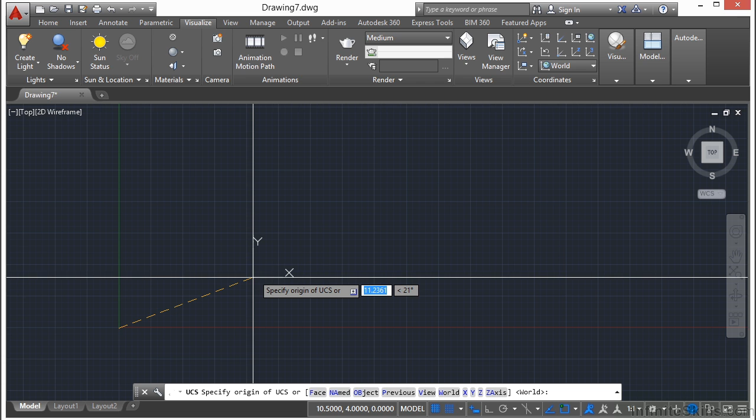Now, you'll note here, once you start the UCS command, that you have a lot of different options available to you. You can create a new UCS based on any of the options listed there. You can also get to a lot of these options simply by right-clicking on top of the UCS icon.

You can go back to your world coordinate system just by selecting the World option. Or you can create a new UCS. You can select that by origin.

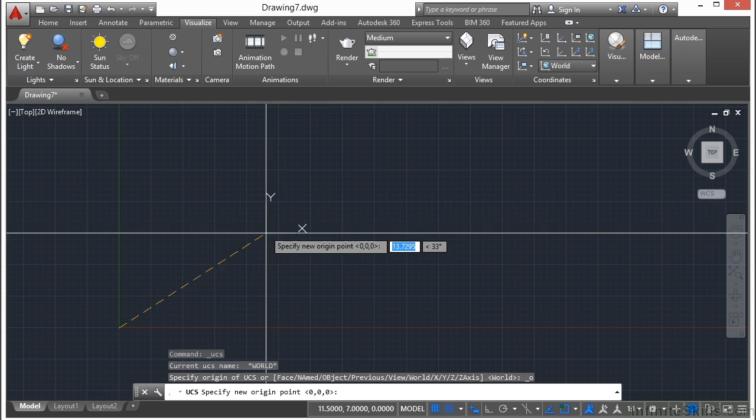So you just pick a new point, and there's the UCS. And you can see that little box is off in the corner. That tells you this is a customized user coordinate system, not the world coordinate system.

So if I select the UCS, I also get some grip options, which we'll talk about later on. But if I right-click on it and click World, that puts me back to my regular world coordinate system.

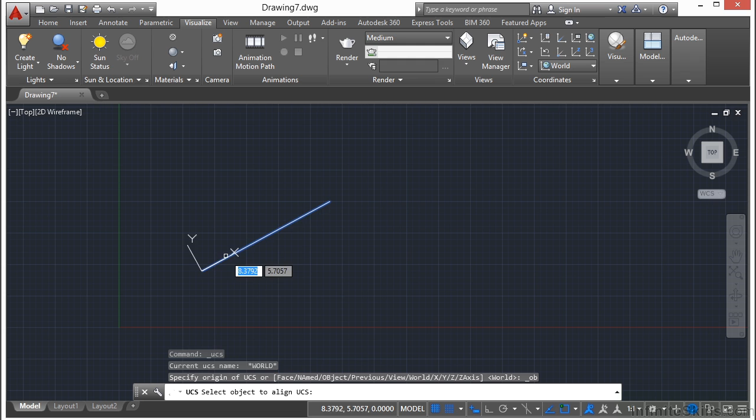So if I have a line, or any other object, but I'm just going to pick a line, and I right-click on my UCS icon, and I select the Object option. I pick an object, and as you can see, it gives me a little preview. That becomes my new user coordinate system.

So it moves my UCS to a new origin, and it rotates it to match the angle of the object I selected. Now if I draw a line and turn on my ortho by pressing F8, it locks me into these orthogonal lines, which are normally perfectly horizontal or vertical, but in this case it's matching the horizontal and vertical of my new user coordinate system. This is a great tool to draw things at specific angles quite easily.

Now, when you work in 3D, the UCS is key. There's a function called the Dynamic UCS feature that will automatically change your UCS to match the face of an object, allowing you to draw on that same plane as the object selected. That's probably one of the most commonly used cases of changing your user coordinate system, when you're working in 3D.

Now, that's getting a little bit heavy for this course, but it's hard enough to keep track of just two axes, much less three, four, or five different coordinate systems that you might want to use. So we're going to try to keep it more simple for you in this introduction.

So you can create your new UCS from scratch by picking a couple of different points. You can even select the icon and just rotate it or move it. Of course, my ortho is on, so I'm going to turn that off.

As you can see, it's quite simple to rotate the UCS that way. You can grip edit it to move it to a new place or make slight rotations, whatever you need to do. Now, after you create a new UCS, you might want to save it. In fact, you probably really need to, in case you want to use it or go back to it later. So create the UCS using any of these methods.

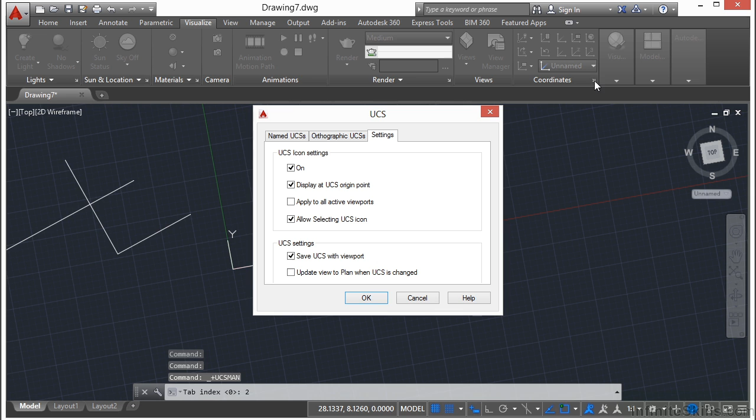Now, if you come up to the Visualize tab again, you see here we have unnamed, world, top, bottom, etc. I can click on this little Flyout button right here, and this will get me to my UCS Manager. So I can get to it that way, which is a real easy way to manage it, or I can come up here to my UCS named UCS option. I can select that, and it gets me back to the same place.

And if I go to my UCS icon, right click on it and click on the named UCS option, it tells me I have two different options. Essentially, I can go back to world coordinate system. If I select it and hit Set Current, then that's where it will take me. It'll set this selected UCS as my current UCS. Now I can select the previous one, and that will take me back to whatever UCS I was using before. Now this is the current one and it's unnamed.

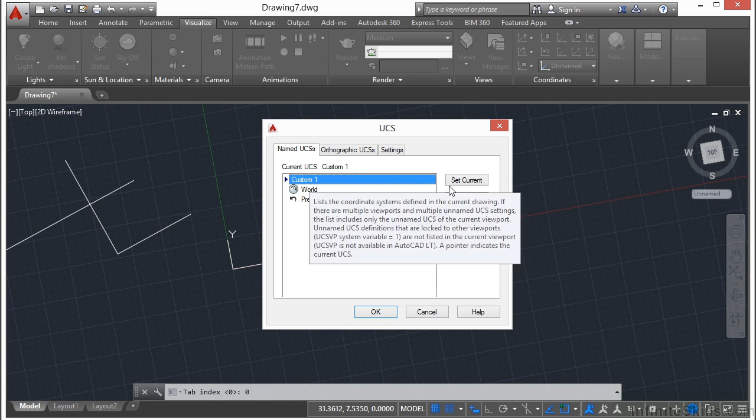If I select inside this box, once I pick it again, I can give it a name. I'm just going to call it Custom 1, press Return. Set current, and it's current. I click OK, and I have it saved in here now whenever I want to use it.

So let's say I go back to my world coordinate system. And if you note here, I'll open up my UCS Manager, go to my named UCS. I have the Custom 1 as a possibility. I select it to highlight it and then hit Set Current. Click OK, and it brings me right back to where I was.

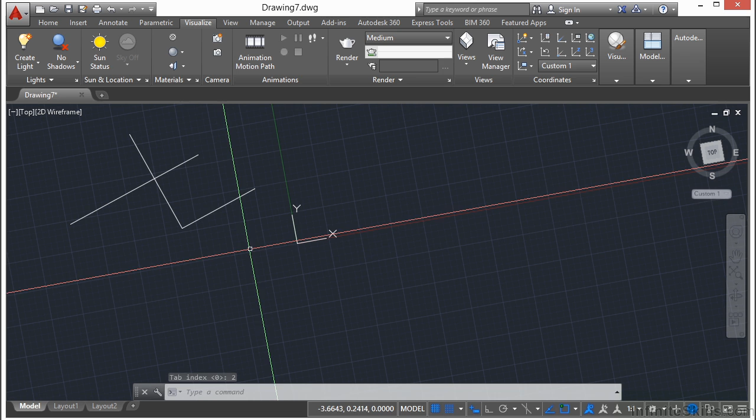So if you go to the trouble of creating a custom user coordinate system, then you really need to save that in case you need to go back and continue working where you were before. So that's one trick you can use to help you work in a different coordinate system and manage that as well. Using a rotated UCS is great for isometric drawings, as you could probably see.

But AutoCAD does have a specific mode for that called isometric mode. This allows you to toggle your rotation very quickly and is actually quicker and easier to use than UCS. Let's open up our drafting settings dialog box by right-clicking the snap icon in the status bar.

So you come down here, right-click on it, go to snap settings. Go to the snap type option and click on the isometric snap. That's what you're going to want to do. You want to turn that on. That will turn on isometric mode, and click OK.

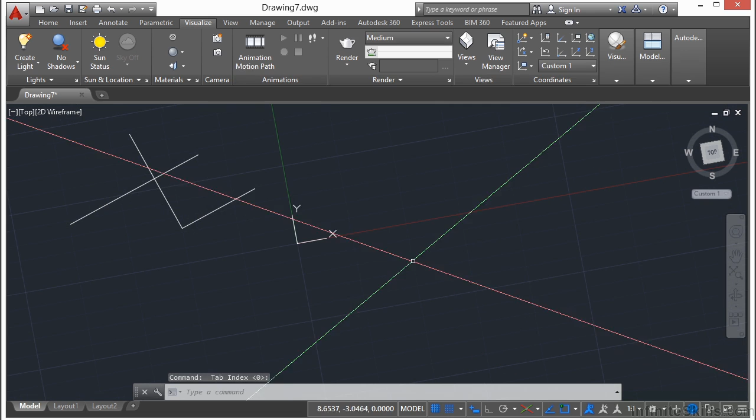So now you see here, you have a sort of skewed and diamond-shaped set of crosshairs. So let's start drawing. If I draw here and turn on F8, this will lock me into isometric mode so that I can now draw a 3D isometric set of line work. So I can kind of draw an isometric view of a cube.

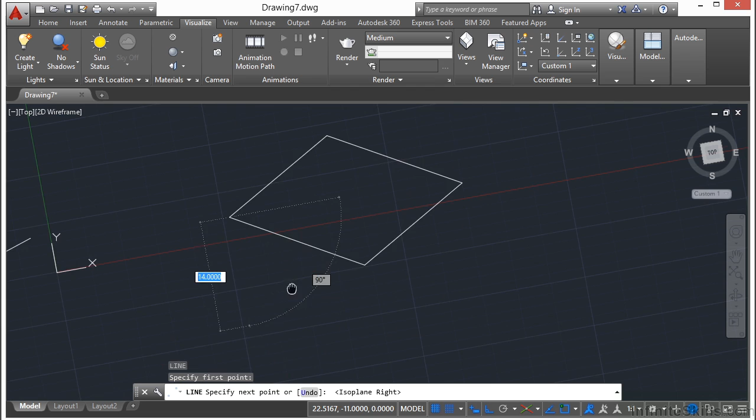So I can come down here and press F5 to toggle through my different isometric planes. And you can see as I toggle through them, my axes change. And so by very quickly pressing the F5 button, I can very easily draw whatever it is I need to draw. It looks like I've drawn a 3D box, though I've never left my 2 dimensions.

Whereas drawing with UCS can make an isometric easy, it can, but it's in one plane only, so you have to keep changing your UCS to get that special look you need. You can also use the isometric settings, just by right-clicking on the snap settings, click the snap settings button, and make sure the snap type is turned to isometric to do that special view. And you press the F5 button to toggle through, or you can click here on the status bar to toggle through the different isometrics, tops, and other views that you want.

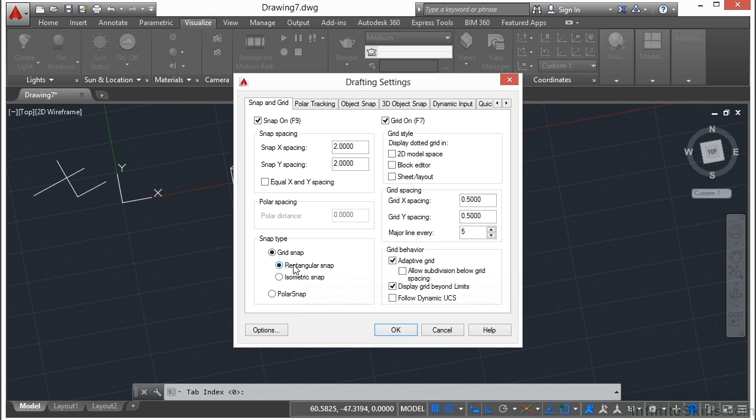And when you're finished, make sure you turn this back. And there you go. So you can see how a UCS that you've customized can really help you out in making specialized drawings.